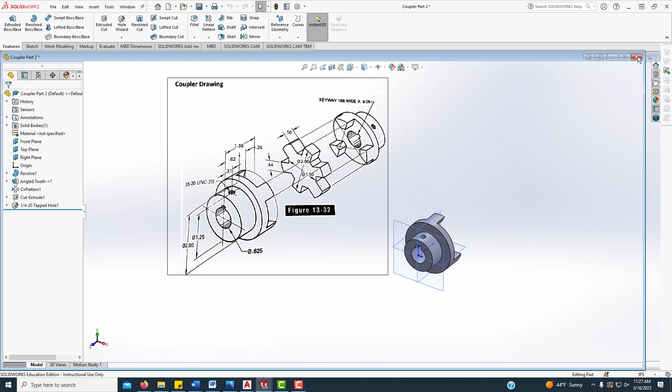I already have the assembly up, so I'm just going to close this out. I have two assemblies here: the coupler assembly similar to the one you just made, where it brought the coupler in, and then one that's already created.

I am going to explode this view so you can kind of see it, and what I want you to look at as we go through this is the mates. We have a coincident mate between those two parts.

A concentric mate between the circular part of it, and then another concentric mate, and then we have an angle because this needs to come in at an angle. We have a coincident on the other side, another concentric, and then another angle mate there.

So the way we're going to draw this, it's not going to be exactly like what we see here because we're going to create this part within the assembly, but we do need to bring in two coupler drawings and then put an angle mate on those so we can actually mate them up.

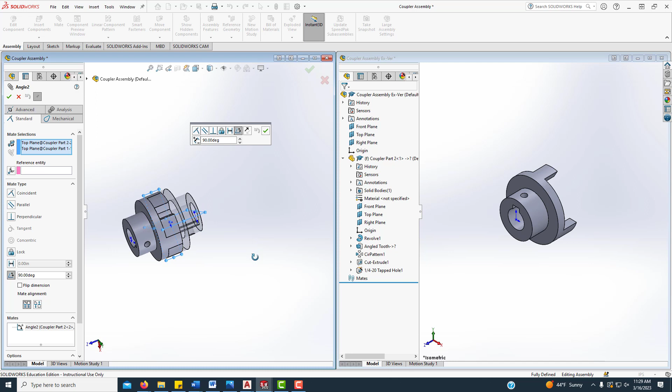This particular mate, if we look at it, that's a 90-degree angle, so in order for those to meet up, we have to put a 90-degree angle from the two matching planes. That's the first thing we do, bring in another of the same part and then put a mate on it.

And then we'll generate this tooth based on the teeth from the part that we already have created.

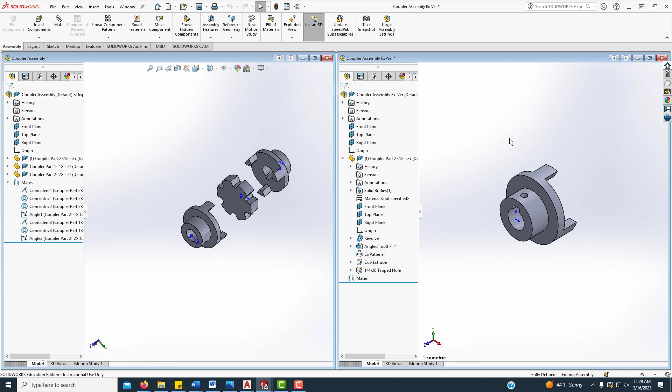So in this mate, I'm going to expand so we can see it. We're going to go up here to Insert Components, and we're going to choose the coupler. I don't have it up, so I have to find it. You probably already have it up, especially if you've already brought it into the assembly and modeled it, and still have the solid model file up, then you won't have to search for it.

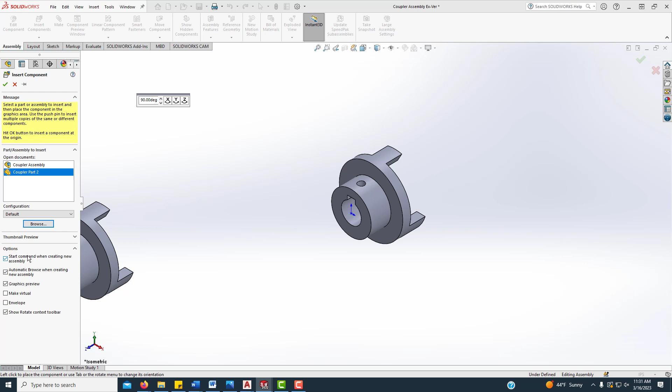Now, when you have an assembly, you can have a way to turn this as it comes in. This makes it a whole lot easier. SOLIDWORKS didn't always have this feature, but in order for it to be showing, it has to have 'show the rotate context toolbar' checked right here when you bring it in.

We do know that this part needs to be rotated, and you can always look at your XYZ UCS coordinate down here, the origin, to see where it needs to be rotated about. We're going to rotate this 90 degrees—actually, we'll do 180 degrees about the Y, and that way it is facing the other direction.

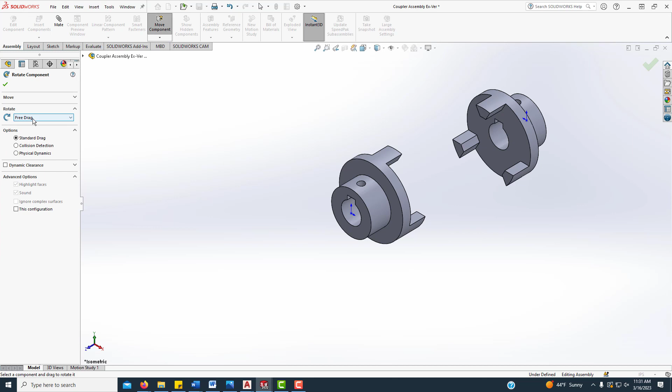Now, what would happen here if we forgot to do that? Say you already dropped it in there and forgot to do that. We can actually come up here under Move Component and rotate a component. If you have to do it this way, make sure you don't free drag anything, because when you free drag it, it's not accurate. But you can do it by delta XYZ, and you can move it here as well. So it's the same thing.

So we really don't want to rotate it. If you need to rotate it, you can do that way. And what we need to do first is set up that angle dimension, so when these are mated together, it's going to do what it's supposed to do.

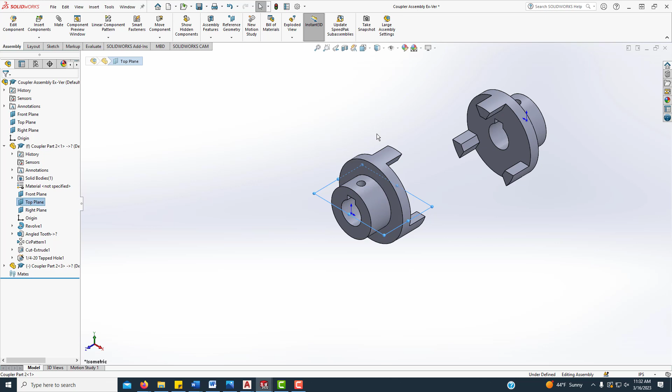So if we take the top plane of the first one—and anything that you bring in, I really didn't talk about this a lot, but when you drop the first component in, it is very important that you turn on the origin before you drop the first component in, because you want the part origin to be the same as the assembly origin. That's something I should have mentioned before we created the assembly.

When you go into assemblies, very important, and this is also on the SolidWorks certification exam, you want to view the origins if they're not already on and drop the part at the assembly origin. That way the first part you bring in will have the same origin as the assembly origin. This is very important because whenever you're mating parts together, or you need a distance or something of that nature, it's going to share the same origin and the same planes.

So if you didn't do that, that's okay on this one, because this is the first assembly we've done, but you'll want to remember that in the future.

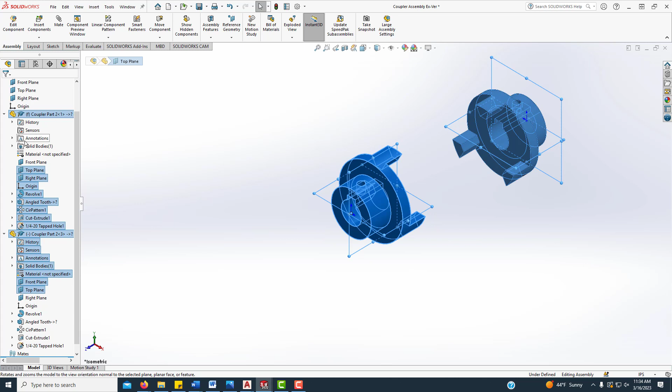So I'm going to take the top plane, and I'm going to take the top plane of this coupler. I'm expanding these out, using the planes from the design tree, and holding down Control—actually, Control is better in this case because Shift will select everything. So I'm holding down Control, and I want those planes to be at 90 degrees from one another.

So I can see both of them are in line, and I want to come up here and click on Mate. Now I could have clicked on Mate first, but I didn't. If you click on Mate first, you can choose the planes the same way. You can expand out your feature tree here—if you click on that little arrow, it expands your feature tree out, so you have the opportunity to select them again. It also brings up this little heads-up toolbar where you can choose some of the simpler mates.

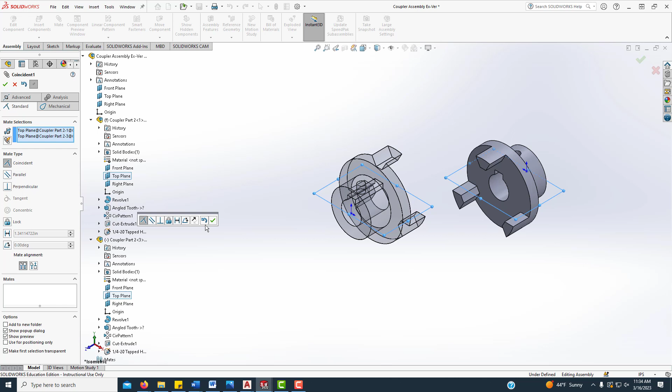We're going to do an angle, so I'm going to click over here and do this angle, and I'm going to put 90 degrees there so it rotates the 90 degrees, and then we'll check that off. So now when we mate these up, it's going to have that 90 degree angle, and it's going to come in like it's supposed to.

Now if we rotate it, we see yes indeed, they're at 90 degrees, those planes are, but we're still not mated like we need to be. If you see it from the side, you see they're not lined up.

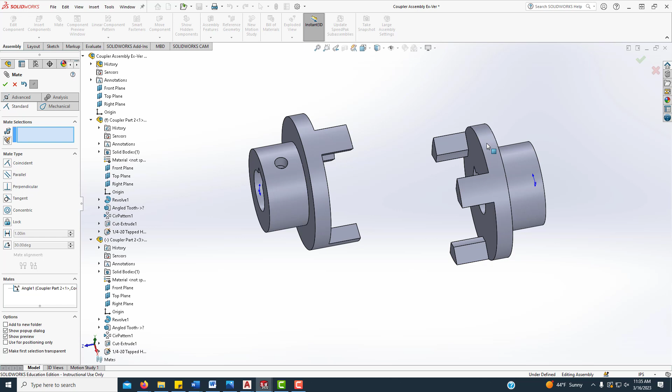So here's where we're going to do a concentric mate. I'm going to select the surface and not the edge. If you see the little square come up, that means we're selecting the surface. If you see a line come up, that means you're selecting the edge. We don't want to do edges, because edges work a little bit different—they can be tangent, which can make the part rotate in a direction we don't want it to.

But if we do the whole face, it brings up the whole face and keeps it where it needs to be. So we're going to do those two faces, and it's pretty intuitive—it knows there are two cylindrical faces, so we'll make those concentric and check that off.

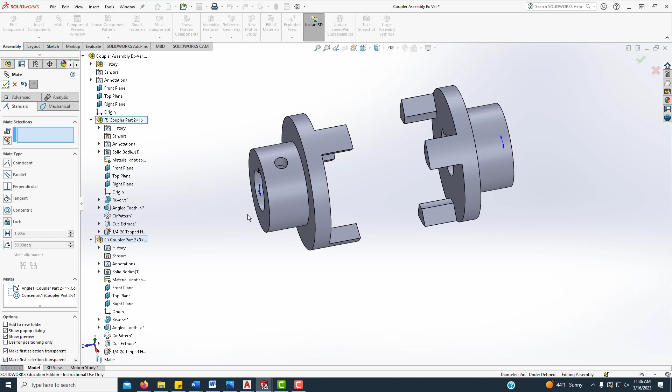Now we're in line, but we're still not fully mated. So we need to do a mate where we mate the surfaces. I'm going to click on this surface and this surface. I'm just rotating with my wheel, and I'll check that off.

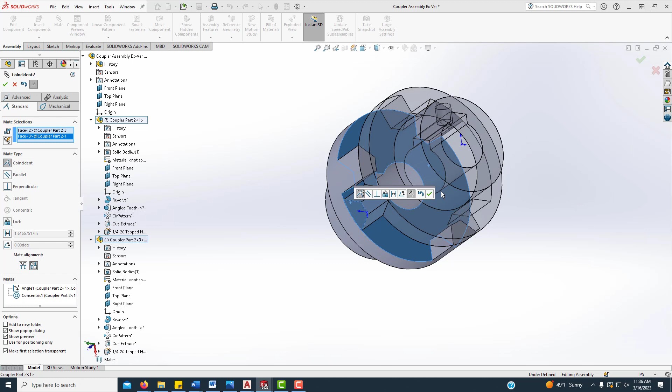Okay, and that should have worked, but we see that maybe our angle is off just a little bit, because this is actually supposed to be in the middle. So if we pop back over to the example assembly here, we can see that indeed this is supposed to be in the middle. So here's where we can see where we're off.

So instead of doing 90, we need to look at that, and it's probably going to be something like 30 or 60. And we can check it.

We can come in here and say, okay, the top plane and that coupler part, and then the top plane and this coupler part. If we look at the mate, we could have used the evaluate tool, but we can see that's actually a 60-degree angle instead of a 90-degree angle. So we need to make room for the second part in here.

Easy enough to change. We can come into our mates. Mates are seen in two different places. We see the mates within the part itself under the mates folder, and then down here in the assembly at the end of the design tree, we see the mates there as well. So we simply want to right click and choose edit feature.

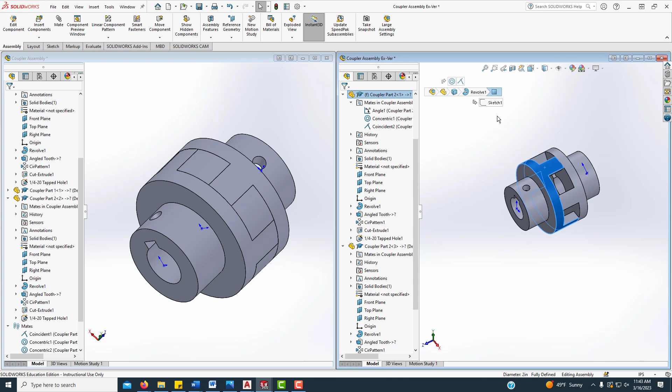Now if we needed to update the part, let's say that we had a drawing that was wrong, and sometimes that happens, and sometimes we have to go back in the drawing and edit it. So if I wanted to edit this part, I could click on the part and come up here to edit component. What that allows me to do is work on the part without opening it.

So if I needed to edit my sketch, this was the very first sketch that we did, I could edit that sketch. If I needed to do an edit on the angled tooth, I could come in here and edit the sketch for my angled tooth, and I could see how I did that sketch. So we don't really need to edit the part.

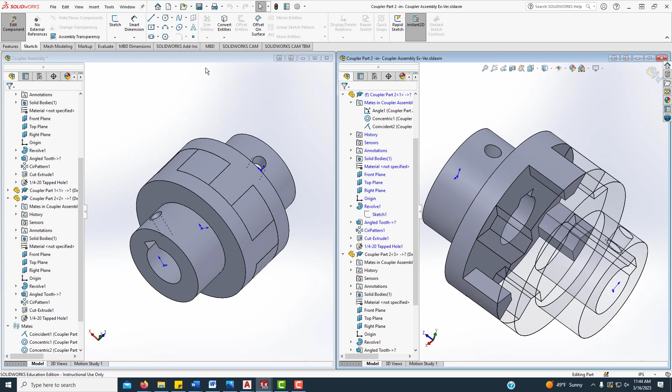So to get out of edit component, you can simply click on the little icon up here in the corner, or you can uncheck edit component up in the upper left.

So now we're going to create the middle part, the spacer here, and we're going to do that straight from the assembly. So where it says insert components, we're going to hit the little arrow and choose new part instead of insert components, because we haven't created this component yet.

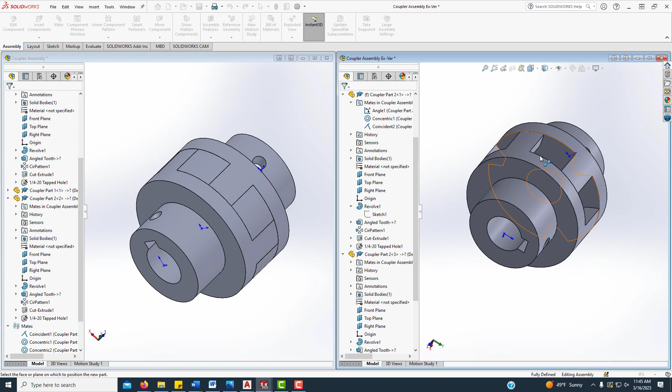And of course I did this a little bit differently in my example, but here we'll go ahead and minimize that other screen, so we can have a full screen on this one. Select the things I was supposed to select.

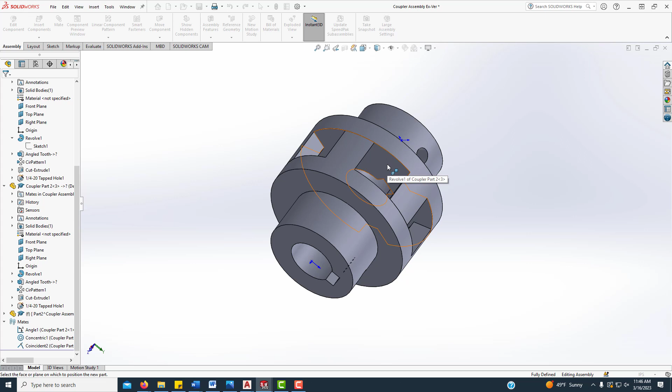So you'll come down here and hit the little arrow and go new part, and then it wants you to click on a surface to start that part. So I'm just going to click on this common surface in here, this inside surface, to put my part on. And all that does is tell us that's the front plane of that part.

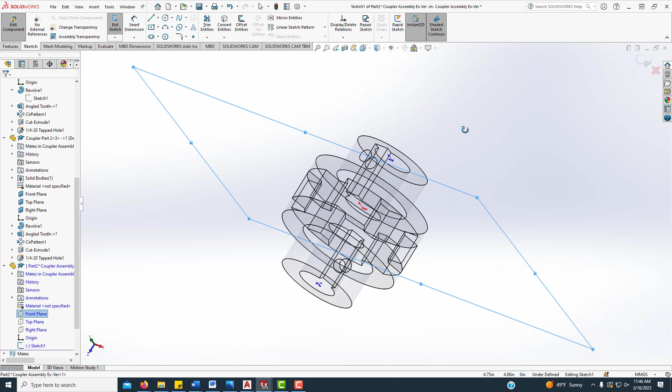Okay, so we chose that as our front plane, and now it's letting me edit that part. If you right click and choose rename part, you can do that.

Now if rename part is not available when you right click, what you're going to have to do is come up here to options. You're going to go down to feature manager, and you're going to have to check allow component files to be renamed from the feature manager tree. So if we don't have that, then it's not going to allow us to rename it. So you may have to come into options, feature manager, and allow components to be renamed. So you might have to check that.

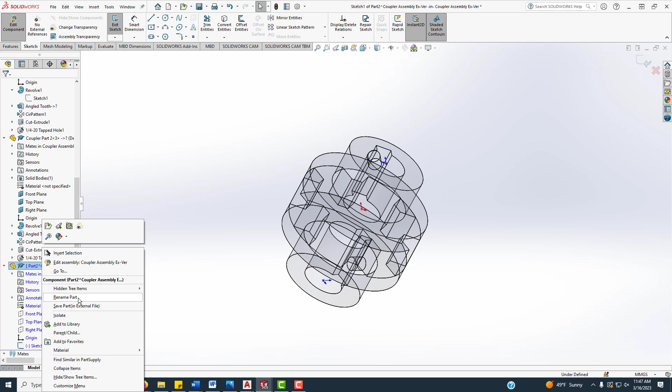I'm just going to rename it and call it... the other one I had named Coupler Part 2, we could name this Coupler Part 1 if we wanted to. Maybe Spacer. Okay, so we've renamed it. I was just showing you how to do that. Not super important for the simplest assembly, but it is very important whenever you're talking about keeping track of all your files. So a good idea to go ahead and do that.

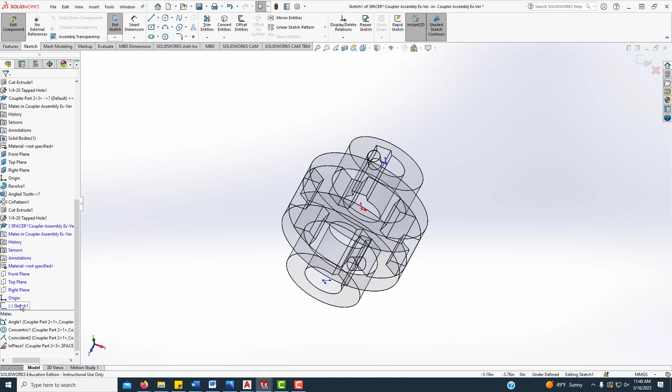And then it already puts us in a sketch. So the way this is going to work, and I know this is very hard to see, sometimes it's much easier, and you can actually utilize the components that's in the assembly by going to Hidden Lines Visible mode.

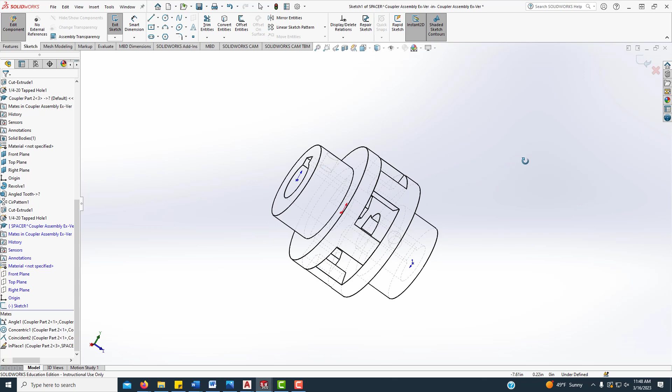Okay, so now we know that we're in a sketch. We know that sketch is on our front view. I'm going to go to Normal To, and I'm going to select some of these lines just by clicking on them and holding down Control. And what happens when I do that, I can convert this entire sketch. I can click on Convert Entities.

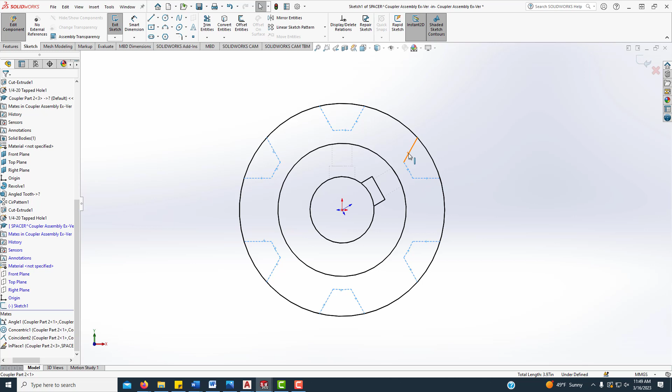And make that into my sketch. So it's basically making that spacer, that gear-like part that's in the middle, it's going to make that for us.

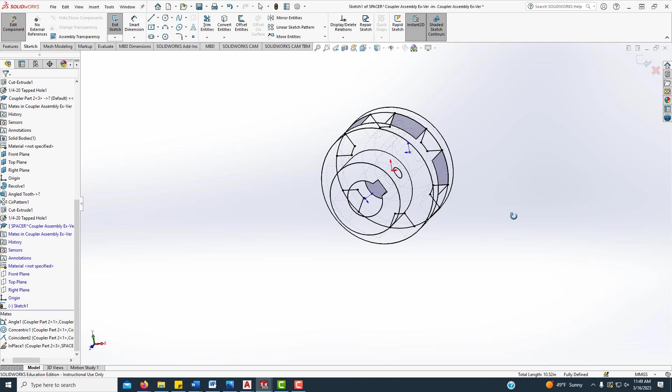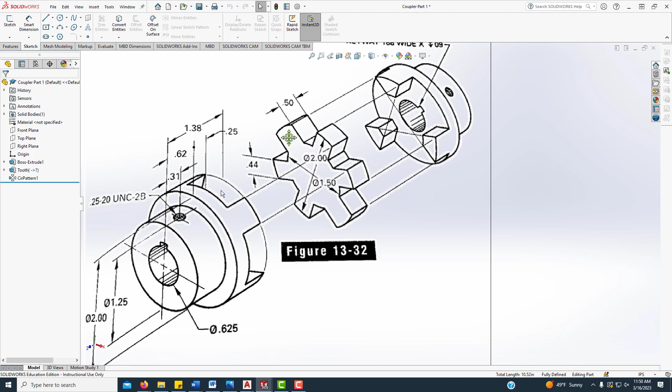Now if we look at this drawing by itself, we can see our dimensions here, and we know that there's no hole or anything in it. It's only the hole and the keyway on the outside, the actual coupling. And then we put this together, and this would be something like on the end of a shaft and a motor, to make those two shafts turn together at the same time. So something like maybe on a milling machine or a bed of a 3D printer, where the motor was turning at the same time as the shaft to move something. So that would be an application here.

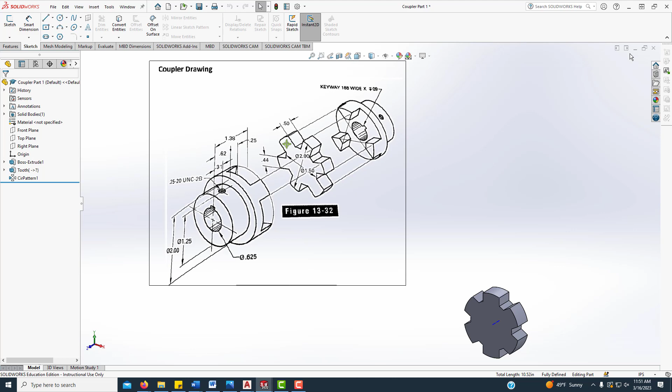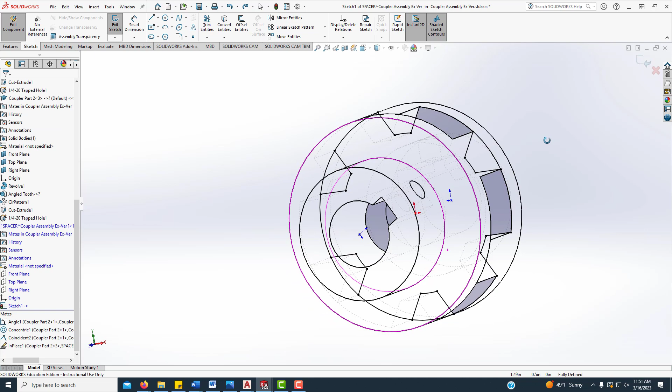For us to just look at the sketch we're creating, basically the outline that we have is complete. So we'd toggle back over here, and we do have to do a little bit of trimming because we don't want the extra line here. So we're going to click on Trim and just trim out where we don't need it. Oops, trimmed too much there. So if you trim too much, you can come in, and sometimes it's easier to rotate and see it.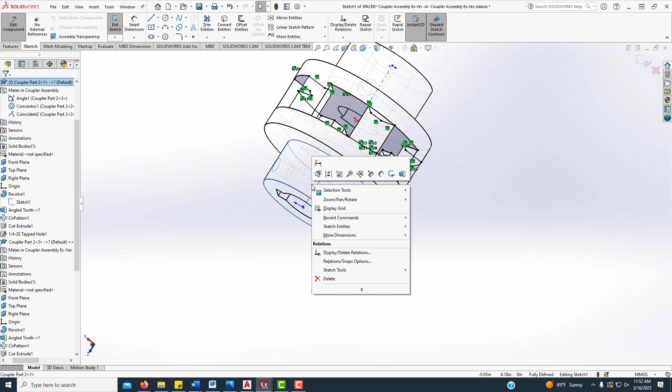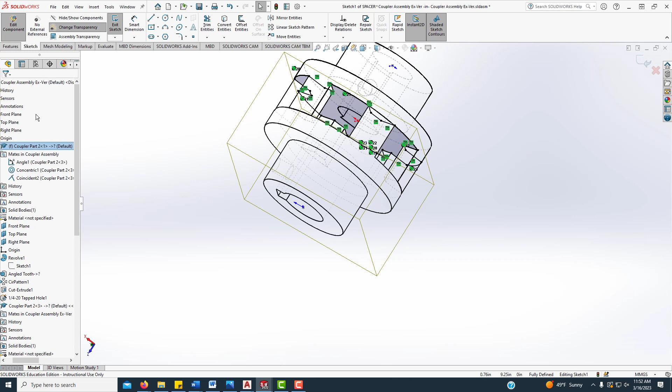Especially in an assembly file, I'm only trimming at the parts. And I can also, if I don't want this part to show, I can right click. It may not let me do it while I'm in a sketch, but I could choose to suppress this part or hide it for a moment so it's not showing. So changing the transparency just makes it clear. That doesn't help us a lot, but I could also hide or show the component.

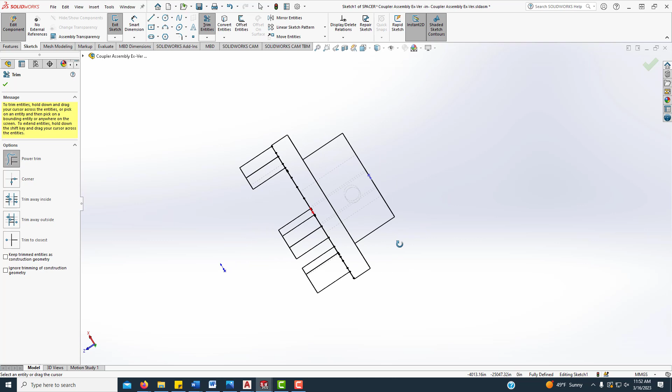So I'm choosing to hide it, so it looks like it takes it away for now, but it doesn't really. And I can see that it does look like I still have more to trim here. I guess that's just part of the object. So I can see that everything is good, and I'm going to check that off.

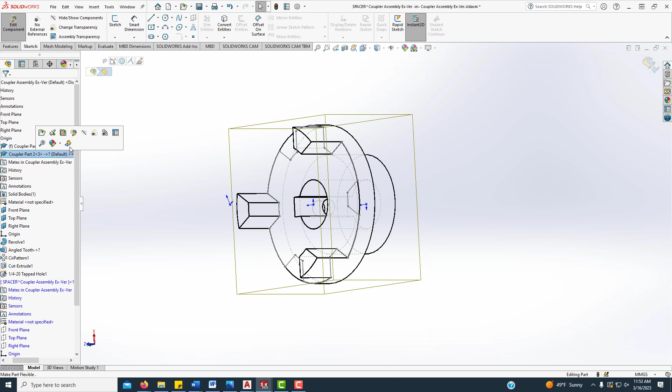And now I can extrude. Now I need to get back that part that I just hid. So in order to get it back, you just come over here and uncheck it. And so I want both of those to show.

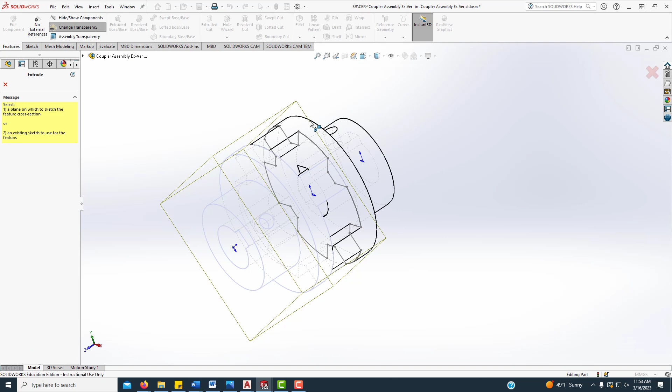The reason why I want that to show is because whenever I choose the extrude command, if I click on features and go to extrude, since I'm still in that sketch, I'm going to choose the sketch to extrude, but I'm going to tell it to extrude up to a surface. So instead of going blind, I'm going to say up to surface, and I'm going to click on the opposite surface that it needs to go up to, and check that off.

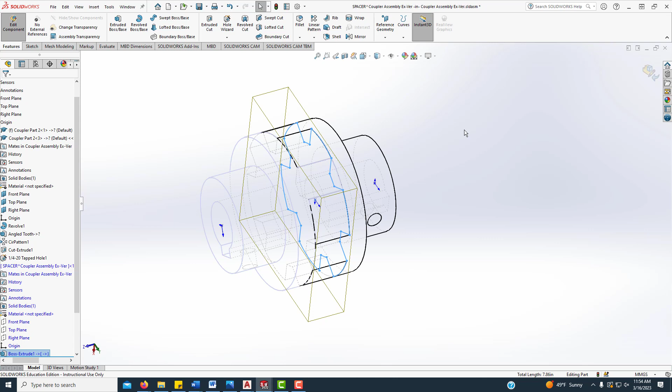So now I'm pretty much done with that component, but let's change our view here. I can see that it's indeed in there and it looks like what it's supposed to. And as soon as I check off edit that component, all of it shows.

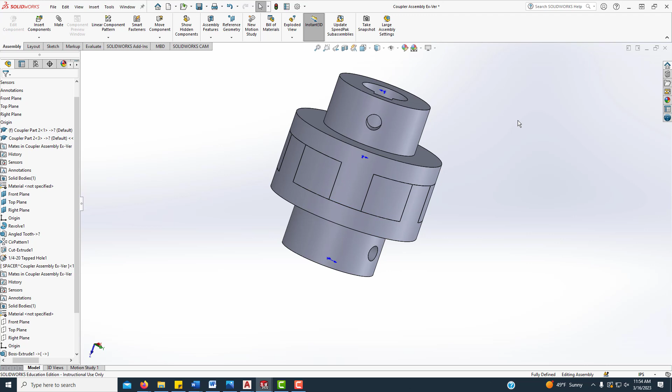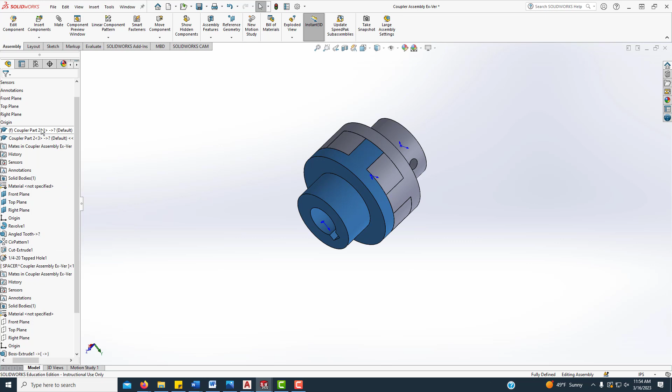Now this one, remember I changed the transparency on it, so I can right click and choose to change that back. But if you're in an assembly and you need to see inside somewhere that you can't see, you can either hide the component or change the transparency. So if I hide it, I have to come over here in the feature tree to show it again, but I can also change the transparency and make it clear so I can see through it. Different ways that you can do those things. You can also change it to show just the outline or with hidden lines visible.

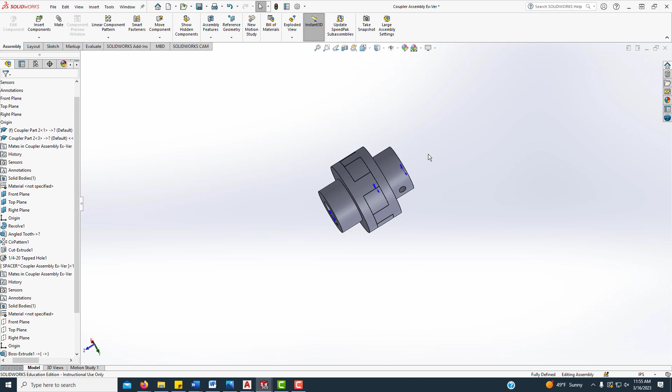So lots of things that we can do there. Now we have this coupling, and to finish off our assembly, I'm going to go to a zoom isometric. So this is what it would look like in an isometric.

Maybe that's not quite showing it enough, so maybe a trimetric view might be a little bit better for us, and you can still just barely see that back component. Maybe just rotating it a little bit so we can see all three components. And we're going to do an explode view.

Okay, so I'm going to get all of my feature tree up here. In an exploded view, what happens is you want to make sure that you're not clicking in and out of it 3 or 4 times, because then you create 3 or 4 exploded views.

So we're going to click on exploded view, and every time you do an explode step, you're going to hit done right here where it says add step. That will turn into a done. So just make sure you're not, if for some reason you click out of it, don't click this again, because then it's 2 different exploded views instead of the same exploded view.

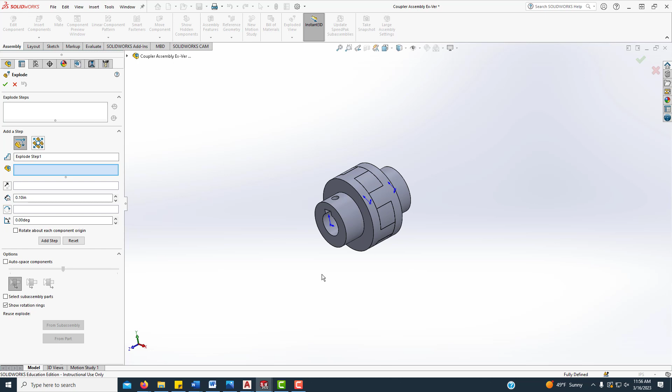So what an explode view does is it allows us to click on the first object we want to move, and this helps us see how these parts are mated together. You can freehand drag it out, but you can also put some distances in here if you want to. You can put an angle on the explode, however you want to pull that part away from the assembly.

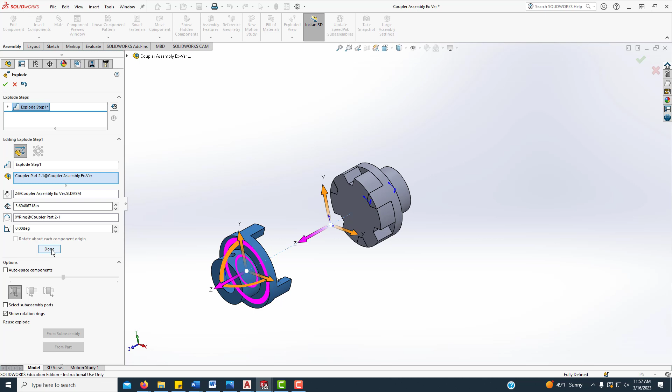And then here's where I was talking about the done. If I want to go ahead and go to another part, then I need to click done here. And then I can click on my next part, pull it out, kind of give it some room to where we can see all of this back part, and then I can hit done as well.

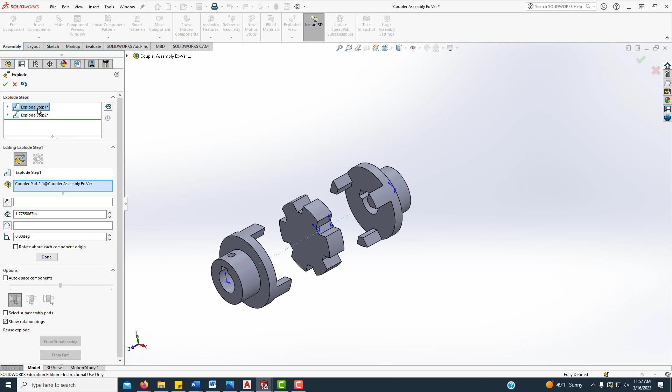Now if I wanted to go back and change this and say, okay, I didn't pull this part out far enough, then the way I would do that is to come up here and change it by clicking on it here, and you can see that it puts the arrow back on it. And then if I wanted to change step 2, I could change it here. Now since we don't really need to move the third part, this is all that we need to do.

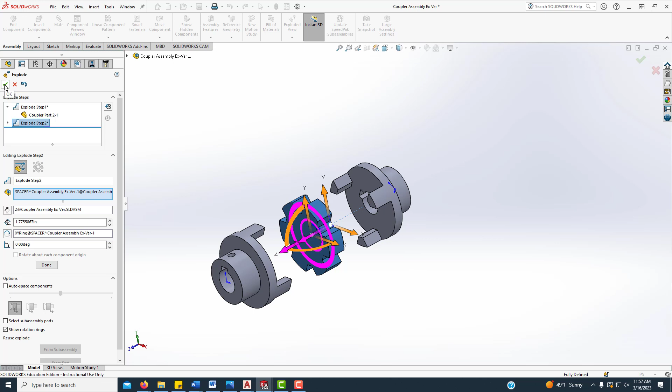We're going to check out of the explode. Now if we were to hit this again, what that's going to do is make another exploded view. The way that you can edit your exploded view after you get out of it is come over here to the configuration manager and expand out where it says default.

And we actually have, I had an original exploded view because I saved this off of another finished assembly that I already did. So that one's grayed out. It's not going to let me get into that one because it's connected to my previous assembly. You won't have that one, you'll just have the exploded view 1 showing up.

But that is the explode. This is how you would come back in and edit it if you wanted to. You would right click here and edit feature, and then it takes you back into this explode. So we don't really need to edit it unless you got out of it too quickly. But the way to get back to your regular feature tree is to click on this feature manager icon.

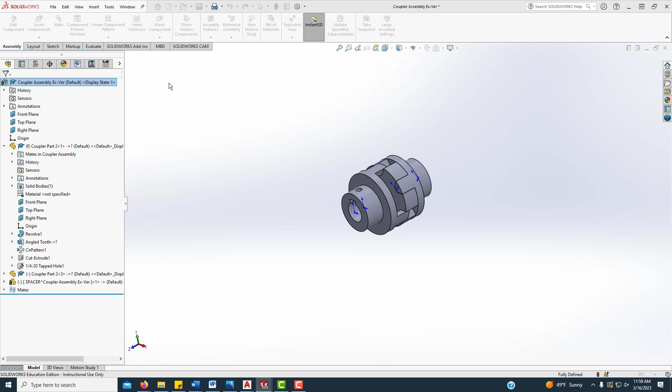And then you can do several different things. If you come up here and right click where it says coupler assembly, then you can hit collapse and it shows it collapse. You can animate the explode where it shows you how it's coming out, how it works. You'll have a toolbar that comes up. Mine, for some reason, in the installation, it would not come up. But yours will probably come up here in the upper left, and you can loop that explode and do all kinds of things.

So that is how you create a part from an assembly, create a part right inside the assembly based on the measurements of your other part. We didn't have to put any mates on this middle part. Now if we created it separate, then we would bring it in just like we brought in the other components, and we would have to mate it just like we mated the other components. But you can create parts right from the assembly.